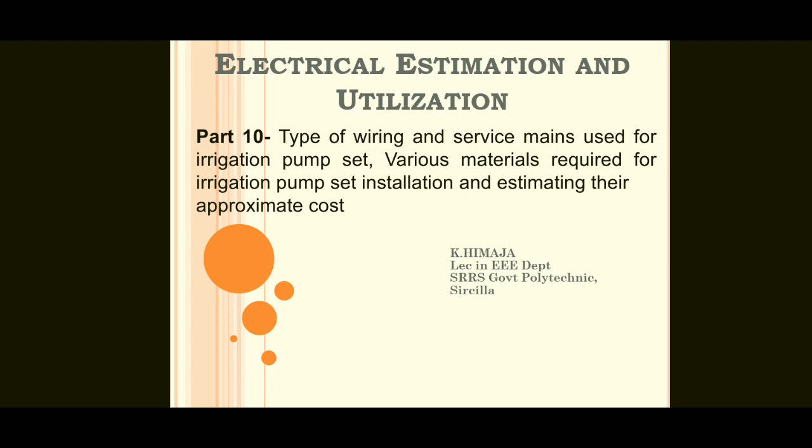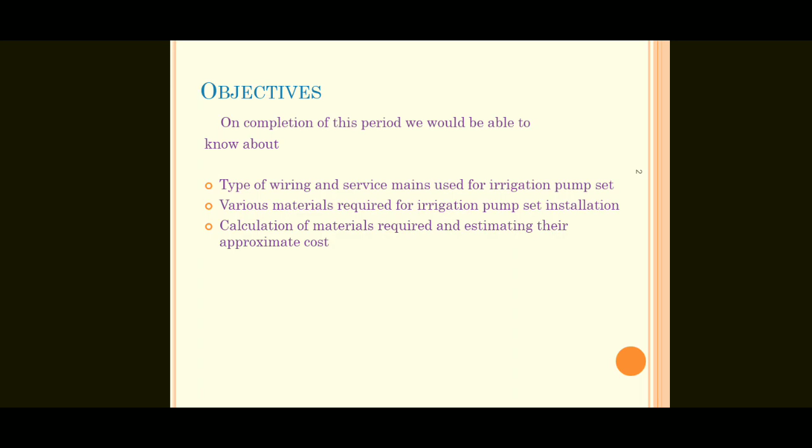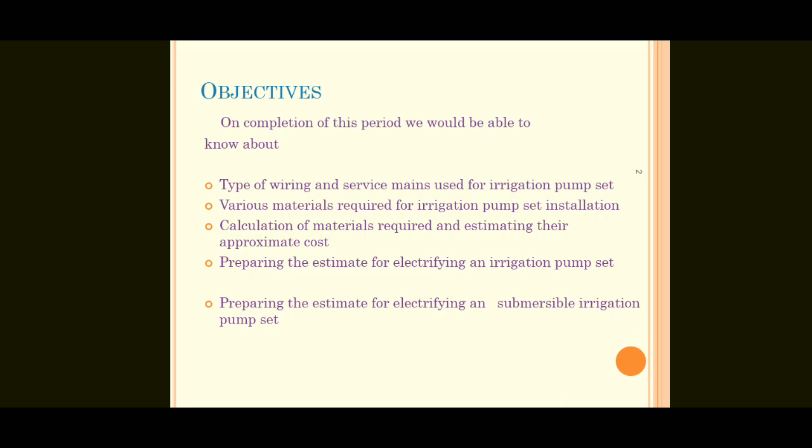So, the objectives of this part 10 are: type of wiring and service mains used for irrigation pump set, various materials required for irrigation pump set installation, calculation of materials required and estimating their approximate cost, preparing the estimate for electrifying an irrigation pump set, preparing the estimate for electrifying a submersible irrigation pump set, and 11 kV by 400 volt plinth mounted transformer.

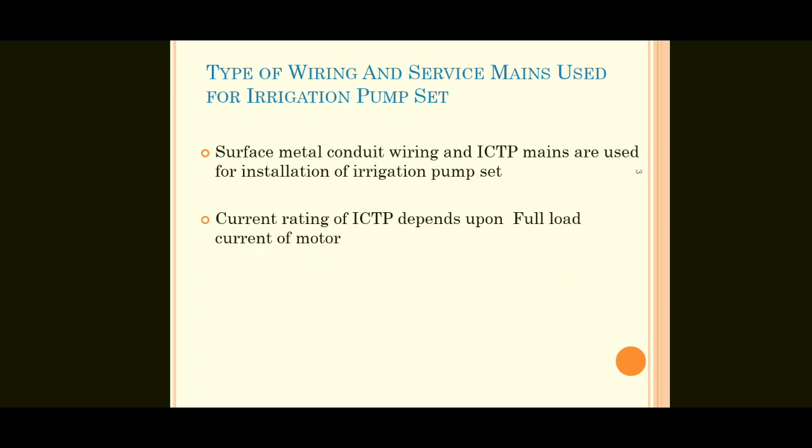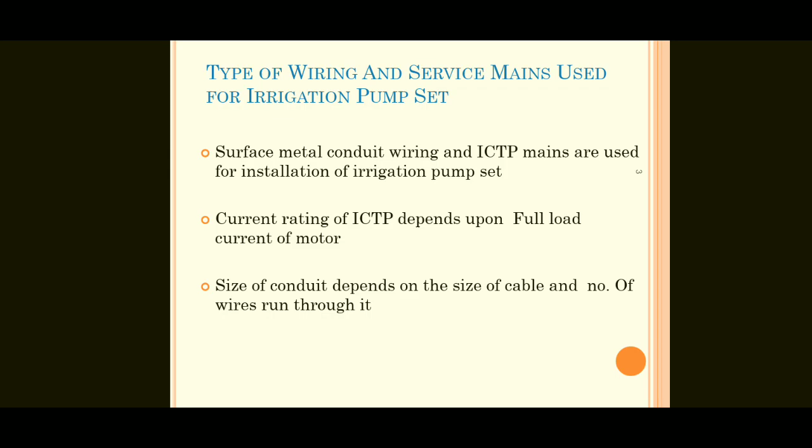Type of wiring and service mains used for irrigation pump set. Surface metal conduit wiring and ICTP mains are used for installation of irrigation pump set. Current rating of ICTP depends upon full load current of motor. Size of conduit depends on the size of cable and number of wires run through it.

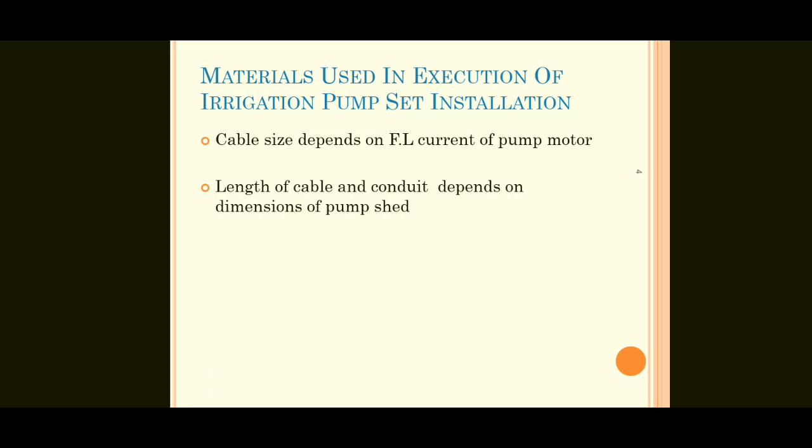Next, materials used in execution of irrigation pump set installation. Cable size depends on full load current of pump motor. Length of cable and conduit depends on dimensions of pump shed. 7/20 SWG AL WP twin core cable is used for connection of supply from the nearby pole to pump motor. The service cable length depends on the distance of its pole from pump shed.

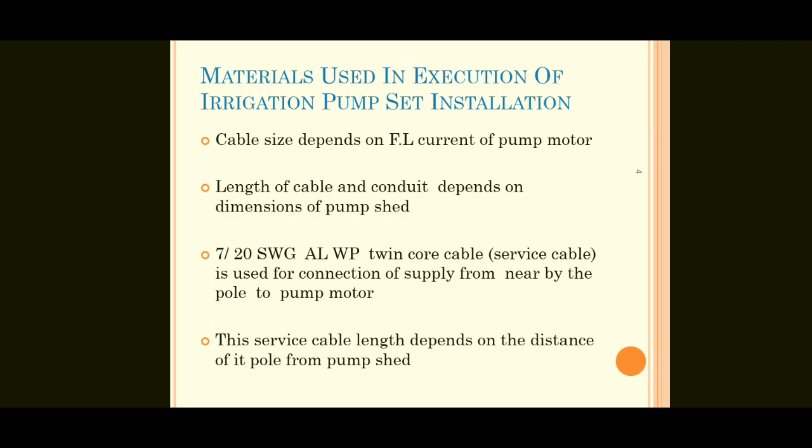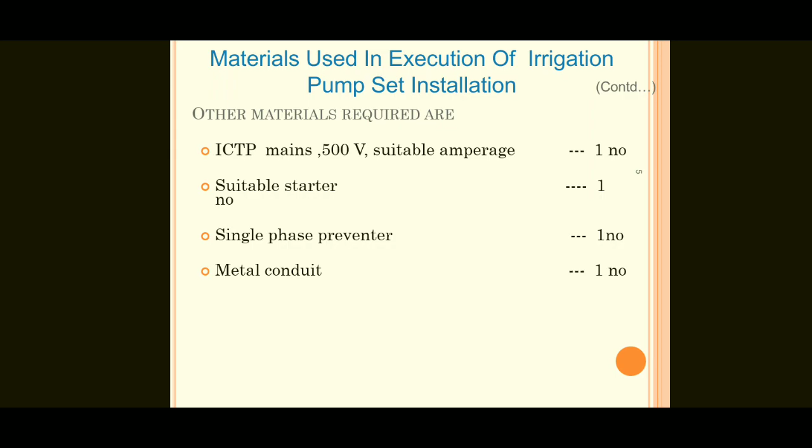So, the other materials required are ICTP mains, 500 volt, suitable amperage, 1 number, suitable starter, here using star delta starter 1, single phase preventer 1 number, metal conduit 1 number, indicating lamps 3, metal flexible conduit, panel board 50 into 30 into 20,

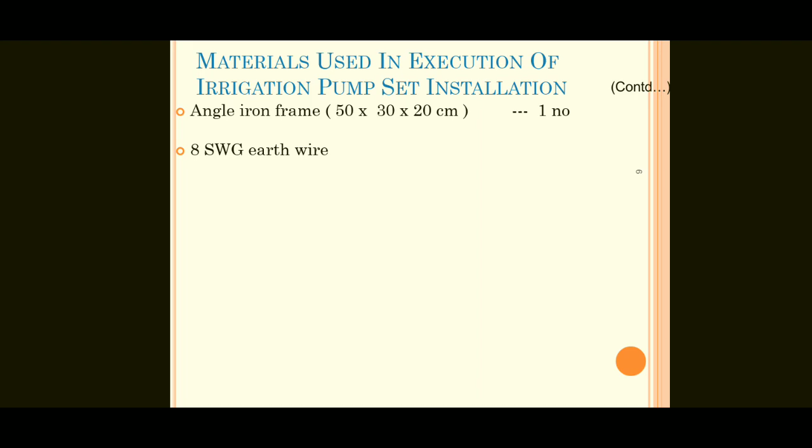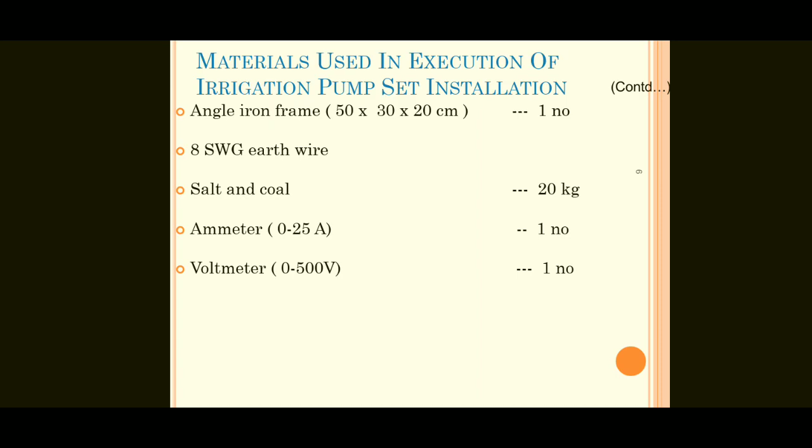angle iron frame 50 into 30 into 20 centimeter 1 number, 8 SWG earth wire, salt and coal 20 kg, ammeter 0 to 25 amps 1 number, voltmeter 0 to 500 volt 1 number, cement 2 kg, danger plate 1 number.

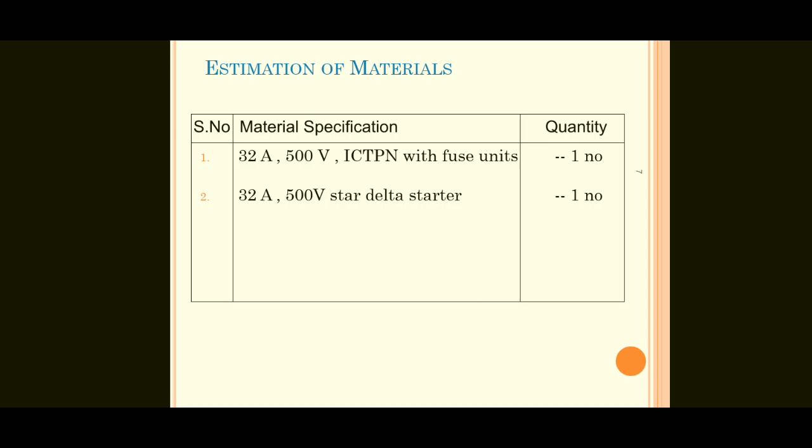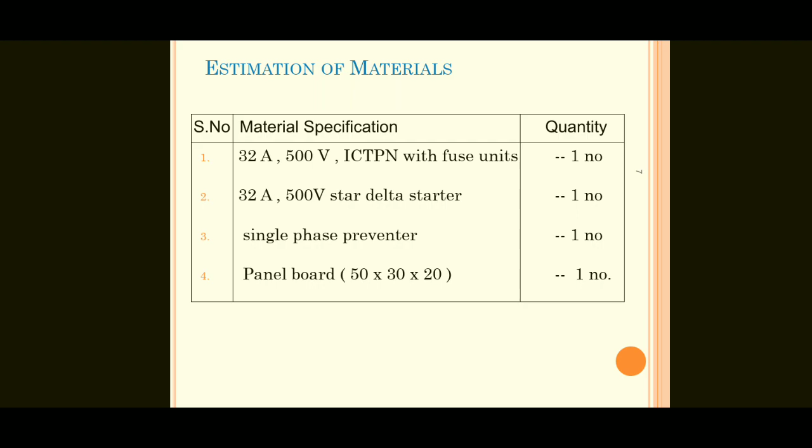Next one, material specification and quantity. Serial number 1, 32 amp 500 volt ICTPN with fuse units 1 number. 32 amps 500 volt star to delta starter 1 number. Single phase preventer 1 number. Panel board 50 into 30 into 20 1 number. 25.4 mm metal conduit, length depends on location of pump. 25.4 mm metal flexible conduit 1 meter.

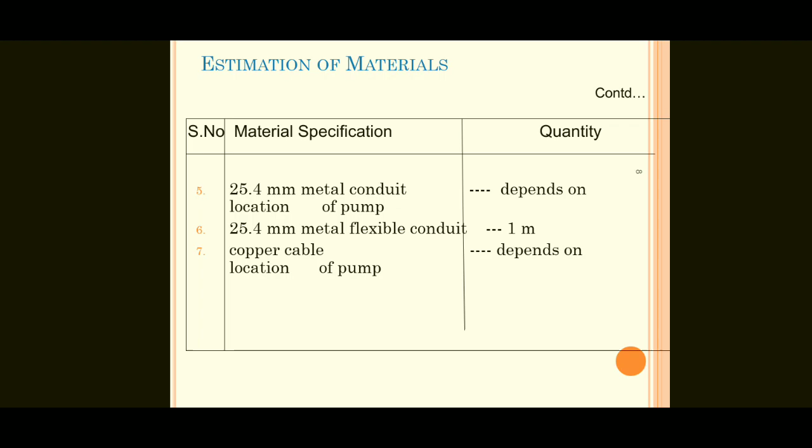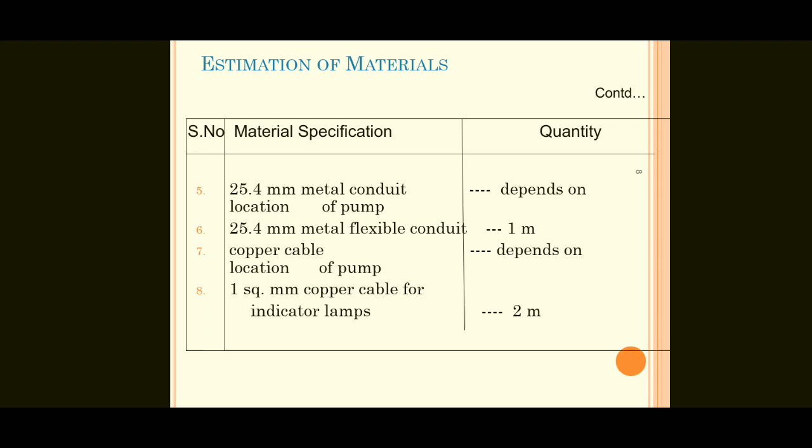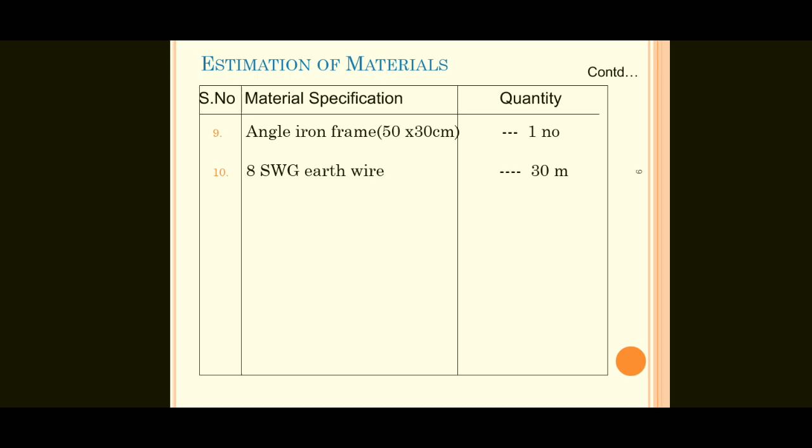Copper cable, length depends on location of pump. 1 square mm copper cable for indicator lamps 2 meter. Angle iron frame 50 into 30 centimeter 1 number. 8 SWG earth wire 30 meter. Salt and coal 20 kg. Ammeter 0 to 25 amps 1 number. Voltmeter 0 to 500 volt 1 number. Cement 2 kg. Danger plate 1 number. So 15 materials are required for irrigation pump set installation, with danger plate included.

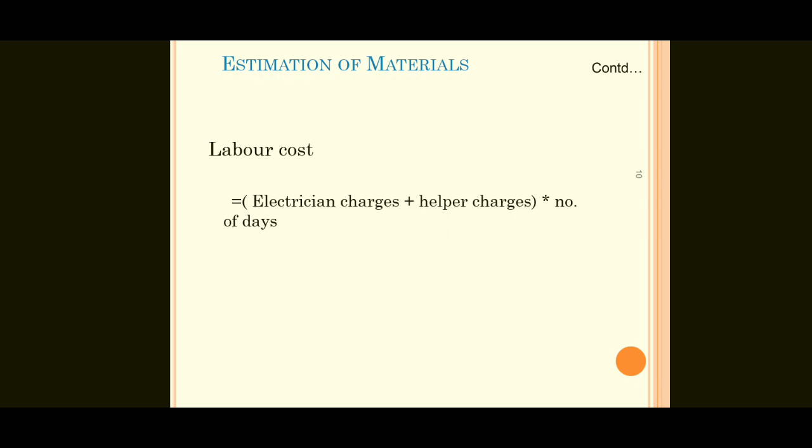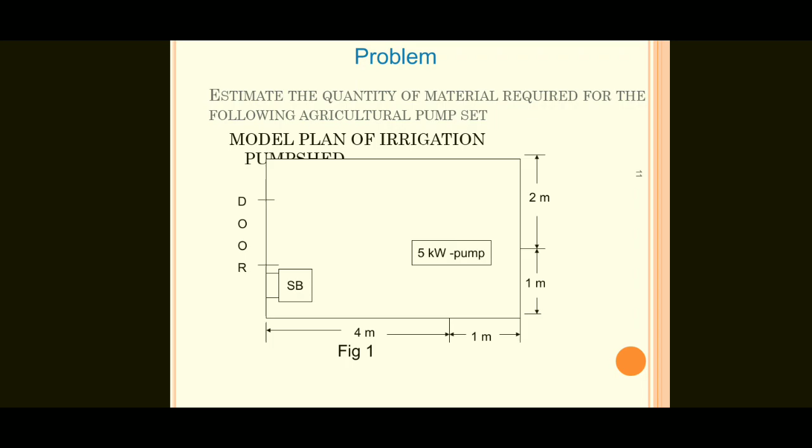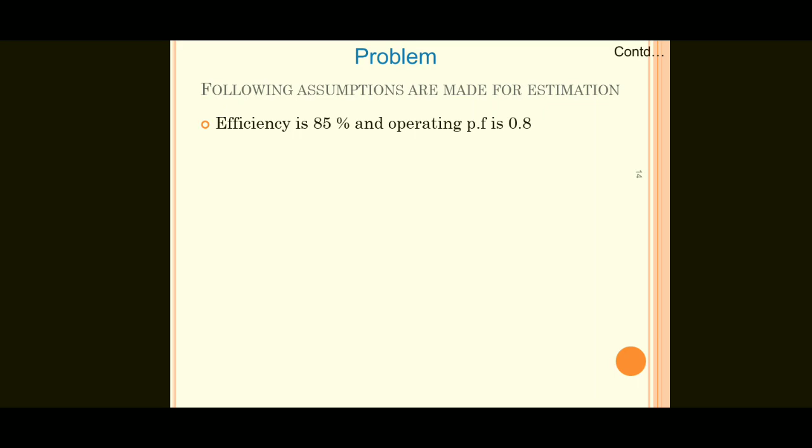Now following assumptions are made for estimation. Efficiency is 85% and operating power factor is 0.8. Distance of LT pole from SB of pump motor is 15 meter. Height of roof in the pump shed is 3.5 meter from the ground. Height of panel board and switchboard is 1.5 meter from ground. Height of HR is 3.0 meter.

Now, efficiency is 85% and operating power factor is 0.8. So, the power factor should be as high as possible. If less than 0.8, then the cost per unit is very high. To overcome these difficulties, place capacitors across the pump set to improve the power factor. Efficiency also above 85% we can expect. Means we have to minimize the losses, losses as low as possible.

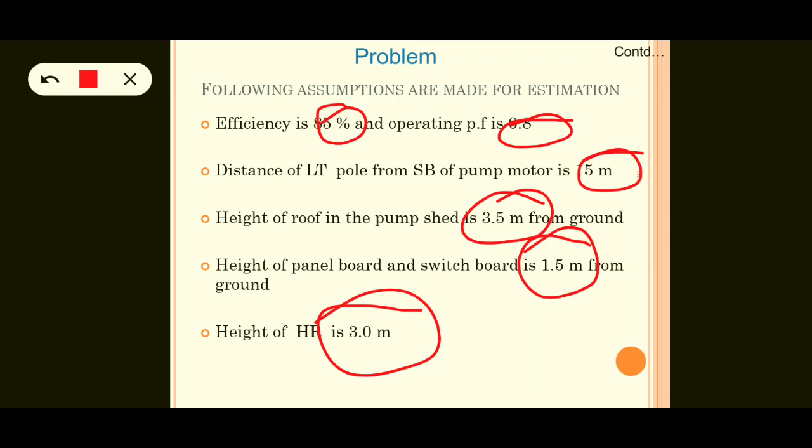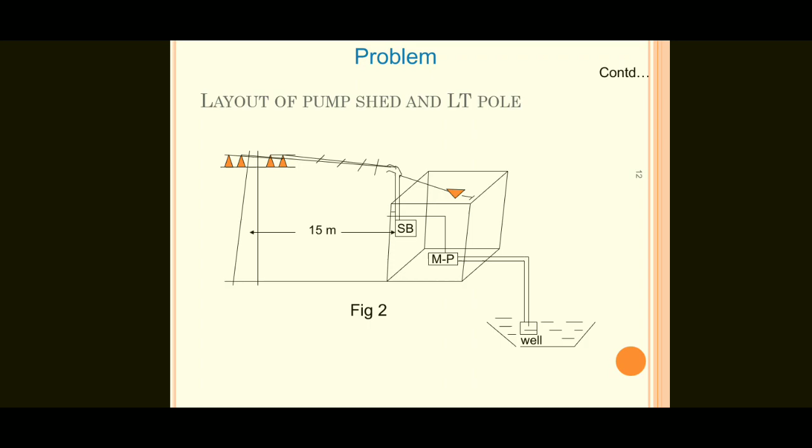Distance of LT pole from SB of pump motor is 15 meter. Next, 3.5 meter. Height of panel board and switchboard is 1.5 meter from the ground. Height of HR is 3.0 meter. So here distance of LT pole from SB of pump motor is 15 meter.

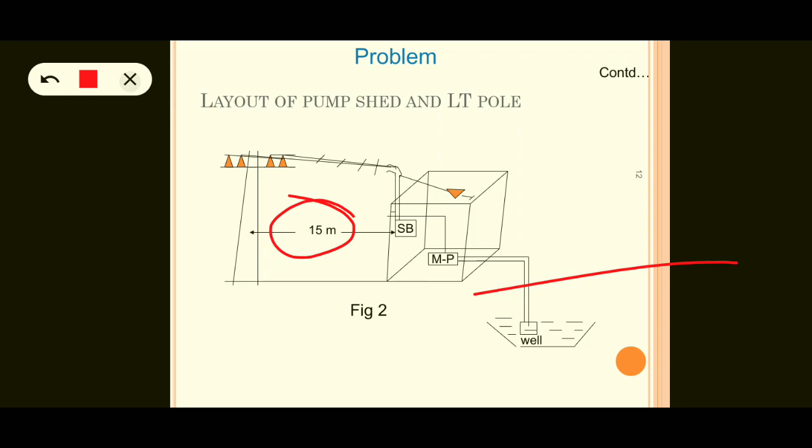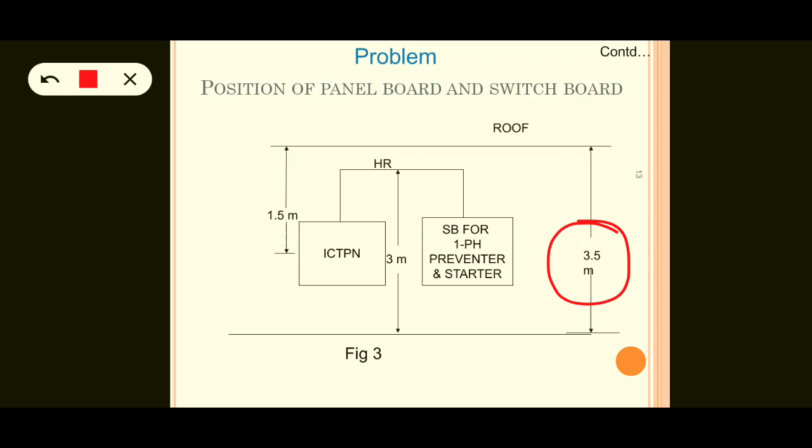Next one, height of roof in pump shed is 3.5 meter from the ground. Here 3.5 meter. Just check this value, 3.5 meter from the ground. Next one, height of panel board and switchboard is 1.5 meter from the ground. Height of HR is 3.0 meters. Now assume 3.0 meters. So one is 3.5 meter, 1.5 meter, 3 meter.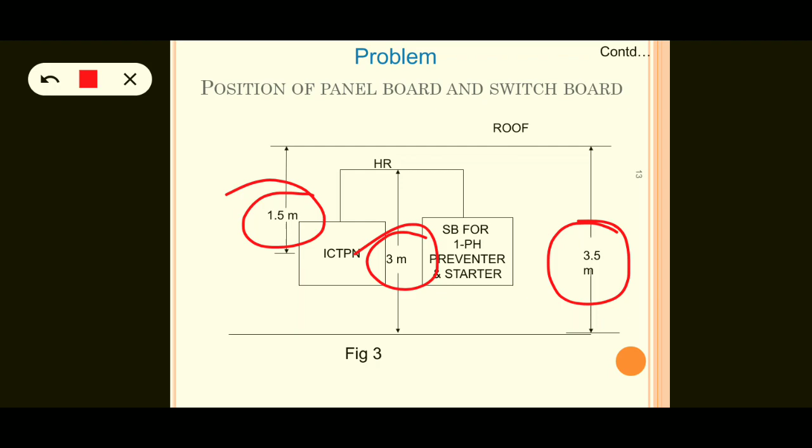Distance of LT pole from SB of pump motor is 15 meter. Efficiency is 85% and operating power factor is 0.8. Now, a simple wiring diagram of pump set. Here ICTPN, RYBN, single phase preventer, star-delta starter, pump motor, indicating lamps.

RYBN: red, yellow, blue, neutral. 3-phase supply is connecting to ICTPN. Next, from each phase, from ICTPN R to the single phase preventer. Each phase is connecting. Similarly, Y, B and N. All are connected to the single phase preventer with lamps.

Means the supply is on, the lights will glow. Off means there is no supply, the lights are not glowing. So name as indicating lamps. So from this, connecting the single phase preventer to star-delta starter. Next to pump motor. Here initially star. Once the motor reaches rated speed, connect in delta connection.

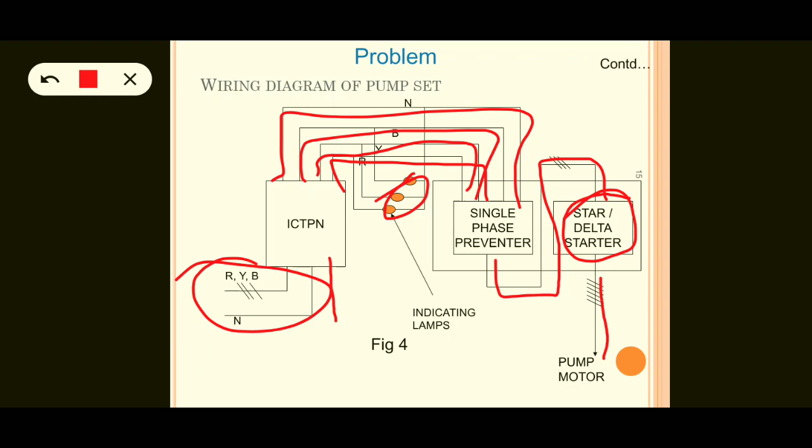Why are we connecting in star? Initially the heavy current flows in the circuit. Because in star connection, I phase is equal to IL. So to overcome this heavy current, run the motor initially in star. Once it reaches the rated speed, place in delta connection. Now pump motor. This is the procedure of wiring diagram of pump set. From the 3-phase supply to single phase preventer with lamps, from the single phase preventer to star-delta starter, from the starter to pump motor.

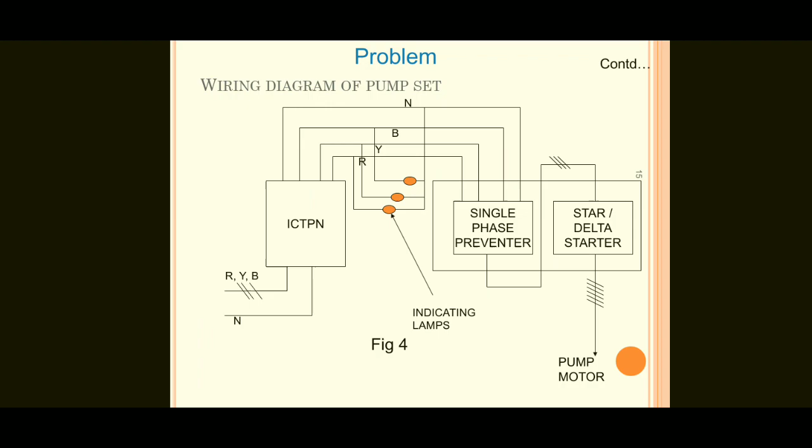Next one, a simple problem on pump set. Size of wire, cable: full load current of motor is equal to kilowatt into 1000 by root 3 into V into power factor into efficiency. 5 into 1000 by root 3 into 400 into 0.8 into 0.85 is 10.61 amps. Because the power factor is 0.8, efficiency 0.85 and the motor is a 5 kilowatt motor, the value becomes 10.61 amps.

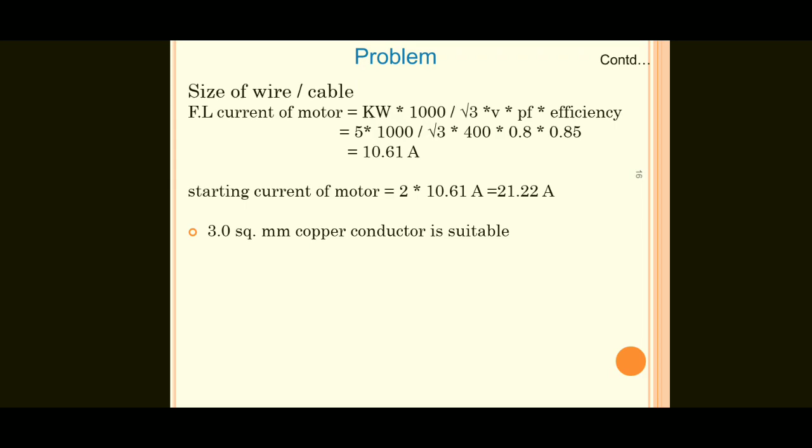Next one, starting current of motor is equal to 2 into 10.61 amps, 21.22 amps. So 3.0 square mm copper conductor is suitable. 1.0 square mm copper cable is suitable for indicating lamps. Size of conduit: 6 wires are run from the star-delta starter to motor terminals. Hence 25.4 mm heavy gauge metal conduit is used.

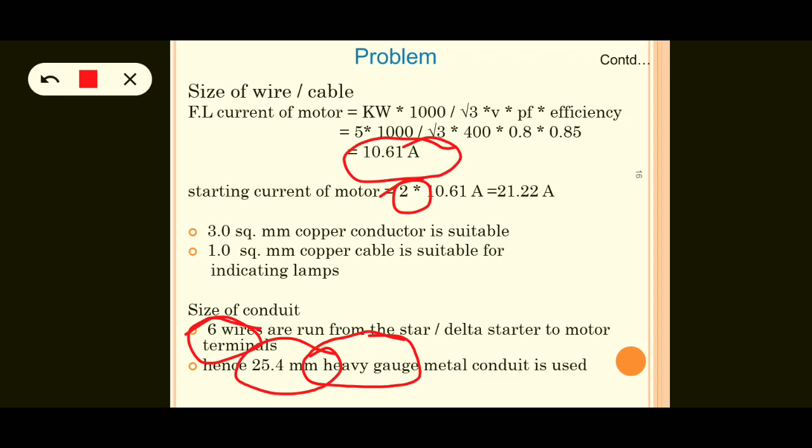Here 10.61 amps. Starting current is 2 to 3 times the full load current for any machine. Here approximately take the value as 2. So 2 into 10.61 is equal to 21.22 amps. So to withstand this high current rating of the pump set motor, the 6 wires are run from the star-delta starter to motor terminals, and heavy gauge means to withstand these high currents, so 25.4 mm heavy gauge metal conduit is used.

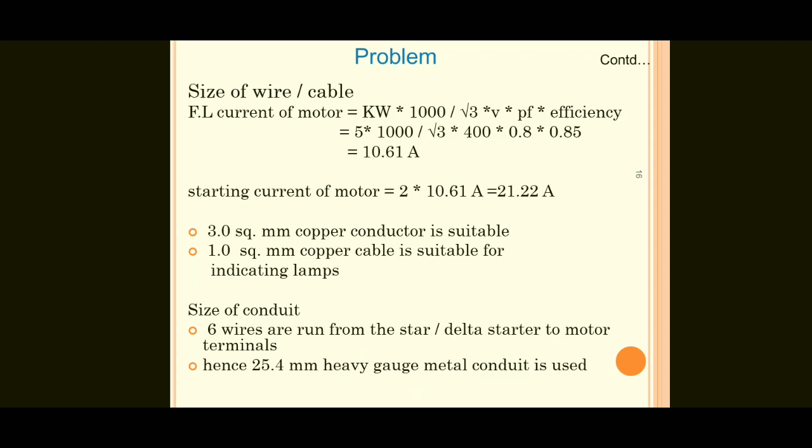So length of conduit on the roof 2 meter. Next, length from SB to motor base: 1.5 plus 1 plus 4 plus 3 plus 1, 10.5 meter. Total length 2 plus 10.5 is equal to 12.5 meter plus 10% wastage. 12.5 plus 1.25, 13.75 meter, 14 meter.

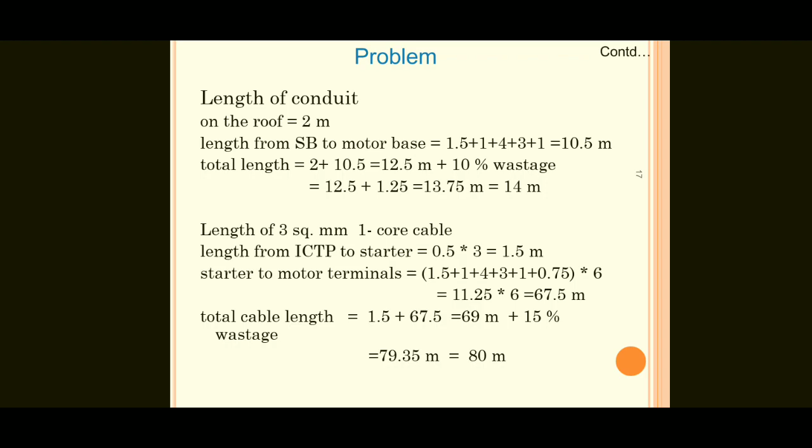Length of 3 square mm 1 core cable. Length from ICTP to starter: 0.5 into 3, 1.5 meter. Starter to motor terminals: 1.5 plus 1 plus 4 plus 3 plus 1 plus 0.75 into 6, 11.25 into 6, 67.5 meter. Total cable length with wastage: 1.5 plus 67.5 is equal to 69 meter plus 15% wastage is equal to 79.35 meter, 80 meter.

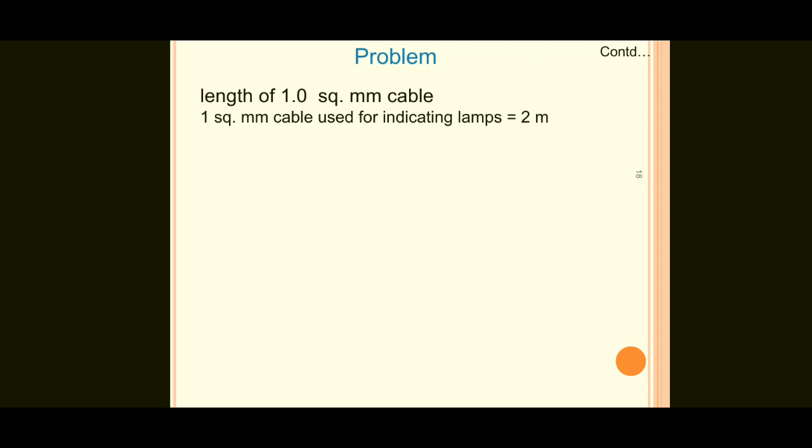Length of 1.0 square mm cable: 1 square mm cable used for indicating lamps, 2 meter. Length of service cable means length of 7/20 SWG aluminum WP twin core cable used for connecting the LT pole to SB of pump shed. 15 plus 2 into 2, 34 meter, plus 15% for sag and end connections is equal to 39.1 meter, equal to 39 meter. 0.1 is very small, so negligible.

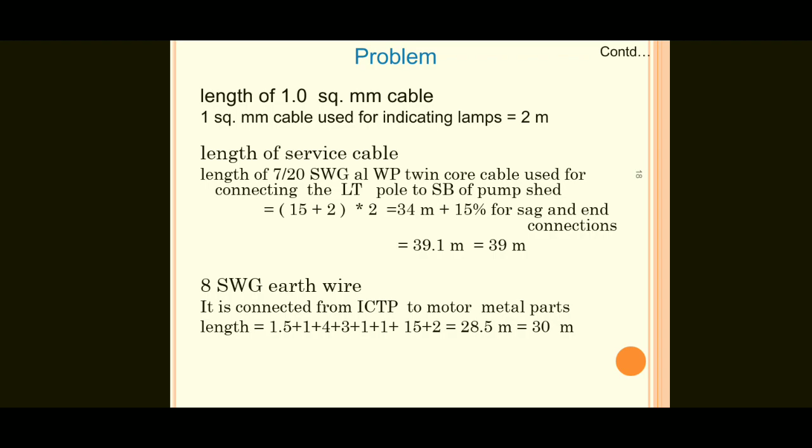8 SWG earth wire. It is connected from ICTP to motor metal parts, length 1.5 plus 1 plus 4 plus 3 plus 1 plus 1 plus 15 plus 2, 28.5 meter, equal to 30 meter.

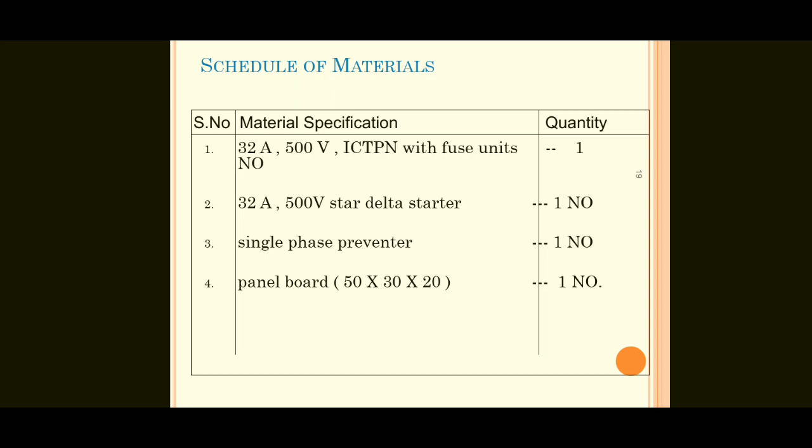So schedule of materials for pump set: 32 amp 500 volt ICTPN with fuse units, 1 number. 32 amp 500 volt star-delta starter, 1 number. Single phase preventer, 1 number. Panel board 50 into 30 into 20, 1 number. 25.4 mm metal conduit, 14 meter. 25.4 mm metal flexible conduit, 1 meter.

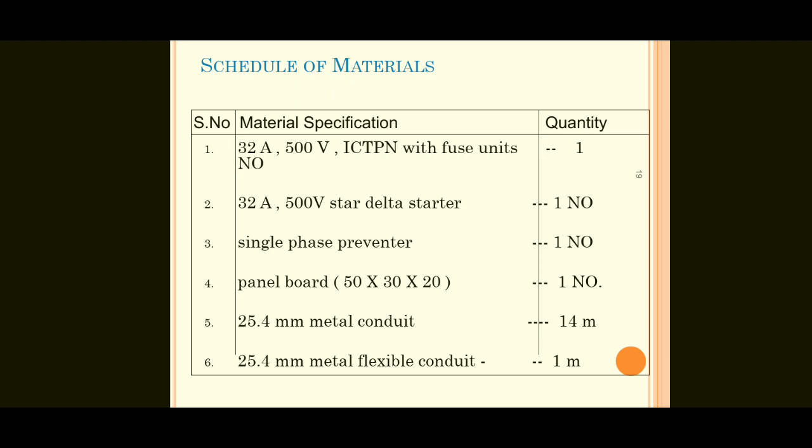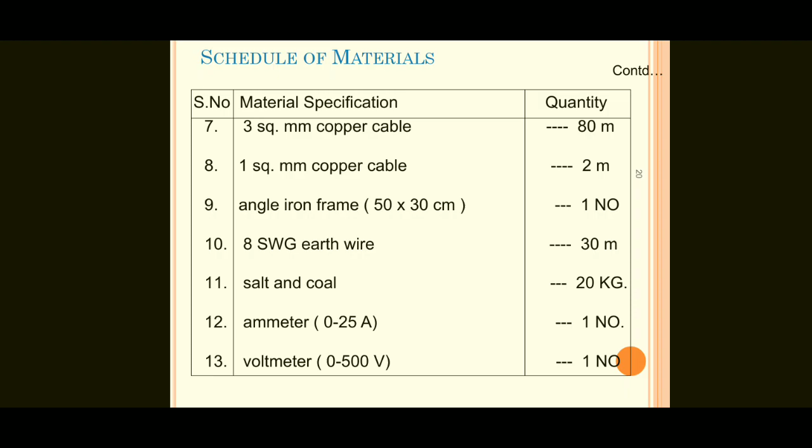3 square mm copper cable, 80 meter. 1 square mm copper cable, 2 meter. Angle iron frame 50 into 30 centimeter, 1 number. 8 SWG earth wire, 30 meter. Salt and coal, 20 kg. Ammeter 0 to 25 amps, 1 number. Voltmeter 0 to 500 volt, 1 number.

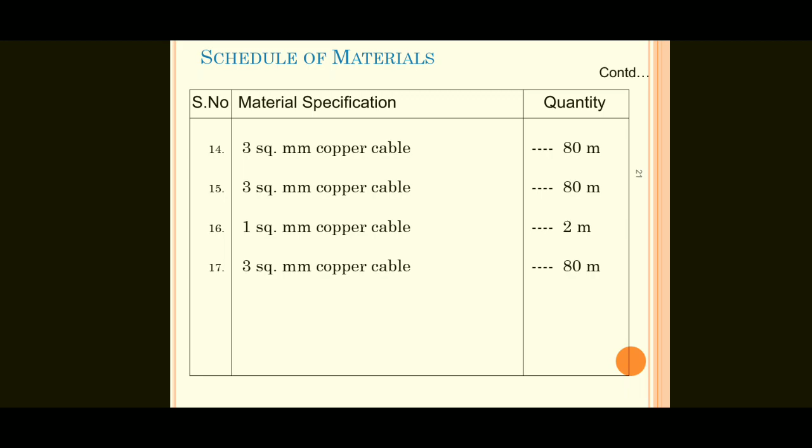3 square mm copper cable, 80 meter. 1 square mm copper cable, 2 meter. Labor cost means, as already discussed, electrician charges plus helper charges into number of days.

So now this is the material required of irrigation pump set. So what are the materials required? And the material specifications and also the labor cost are calculated.

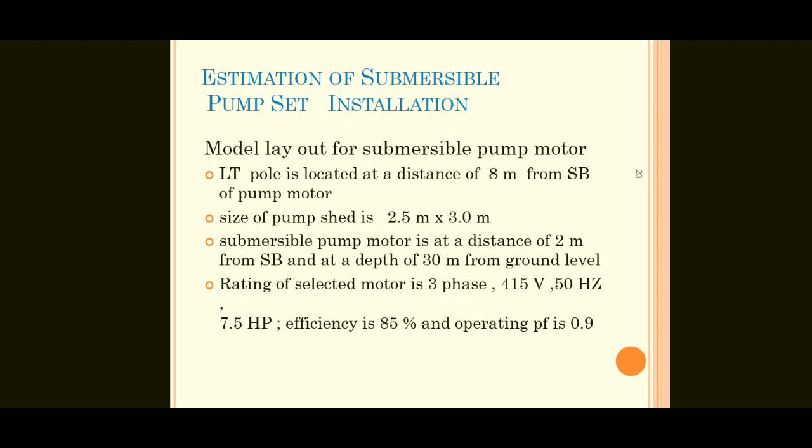Rating of selected motor is 3-phase 415 volt 50 Hz 7.5 HP. Efficiency 85% and power factor is 0.9. Here the important points are 7.5 HP. 1 HP is equal to 735.5 watts. Before, the pump set was 5 HP. Efficiency is same, 85%. Next, here in this case the operating power factor is 0.9; before case 0.8. 7.5 HP instead of 5 HP. 85% is same. Instead of 0.8, now in this case we assume the power factor is 0.9.

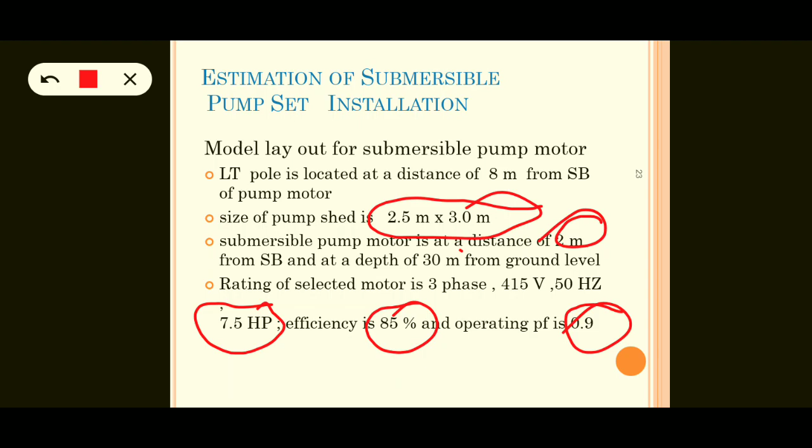Size of pump shed is 2.5 into 3.0 meter. Next 2 meter, 30 meter. These are the ones, you remember. Next one. Now this is the layout of submersible pump set, LT pole and tube well. Now here the submersible pump motor is at a distance of 2 meter. You see this one, 2 meter.

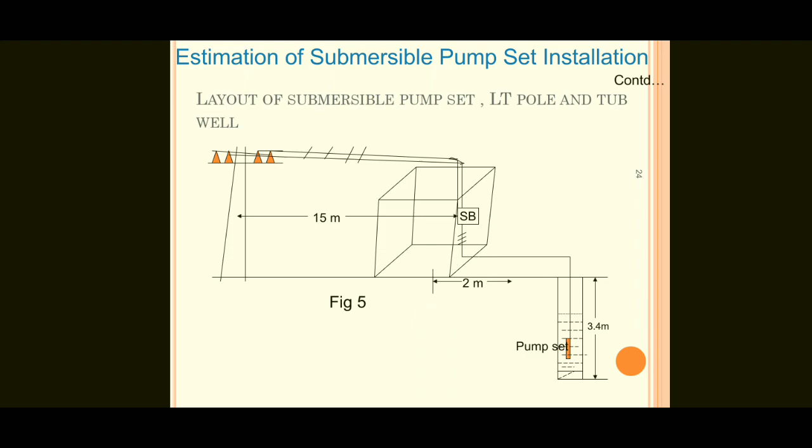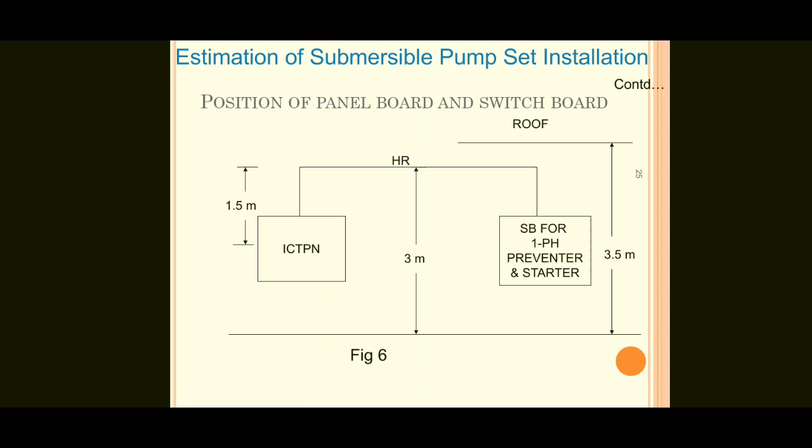Next one, ICTPN, SB for single phase preventer and starter, position of panel board and switchboard. So now the height of the roof from the ground is 3.5 meter. Next, the HR is 3 meter and ICTPN to HR is 1.5 meter. Next one, wiring diagram of pump set. RYB. Here pump set means submersible pump set installation. So ICTPN, RYBN, single phase preventer, direct online starter.

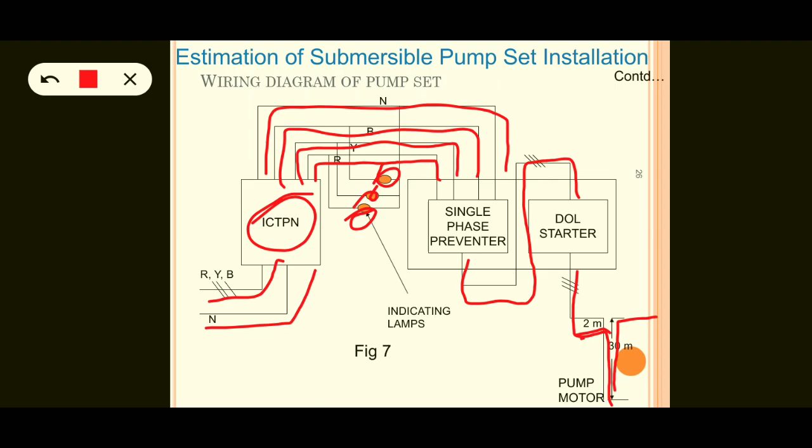So here the configuration shows from RYB and N to ICTPN input, from ICTPN output to single phase preventer R, Y, B and N. Next, for each phase they are placing lamps, means if the circuit is in running condition, the lamps will glow, otherwise the lamps will not glow. Next one, from single phase preventer to direct online starter. Before case they were using star delta starter, now in this case they are using the direct online starter. Next, from direct online starter to pump motor is 2 meter and 30 meter. So this is the wiring diagram of pump set.

Size of wire or cable, same as usual previous procedure. Full load current of the motor: efficiency means output by input. Output was 5 HP; here they are using 7.5 HP motor. Input is √3 VL IL cos phi. We have to calculate the current. So IL is equal to output by √3 V into power factor into efficiency. So 7.5 into 735.5 by √3 into 415 into 0.9 into 0.85. So finally we got 10.03 amps, approximately 10 amps.

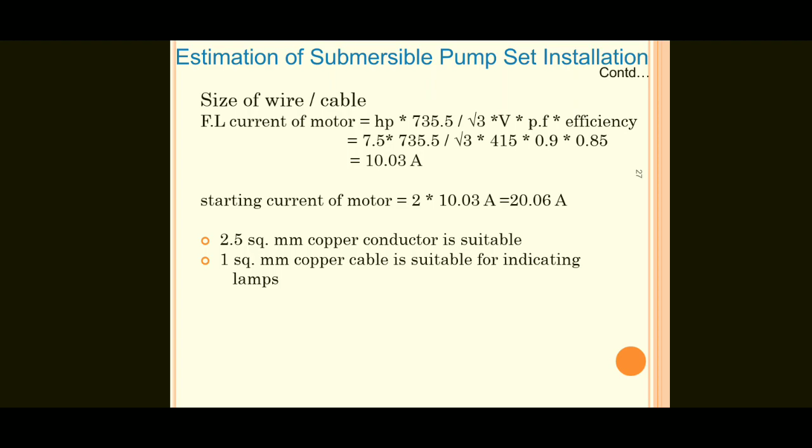Next one, starting current of motor is equal to 2 times 10.03 amps, equal to 20.06 amps. Starting current is 2 to 3 times the full load current. Here we are assuming the value as 2 times, so multiplied with 2. Next, 2.5 square mm copper conductor is suitable. 1 square mm copper cable is suitable for indicating lamps. Size of conduit: 3 wires are run from the direct online starter to motor terminals. 19 mm heavy gauge metal conduit is used.

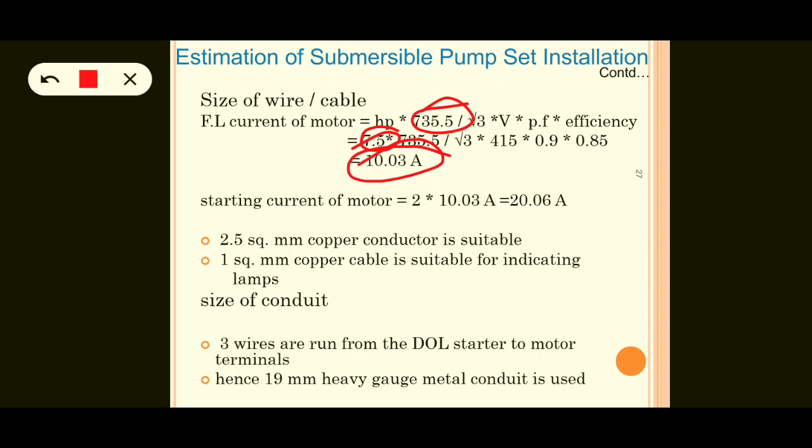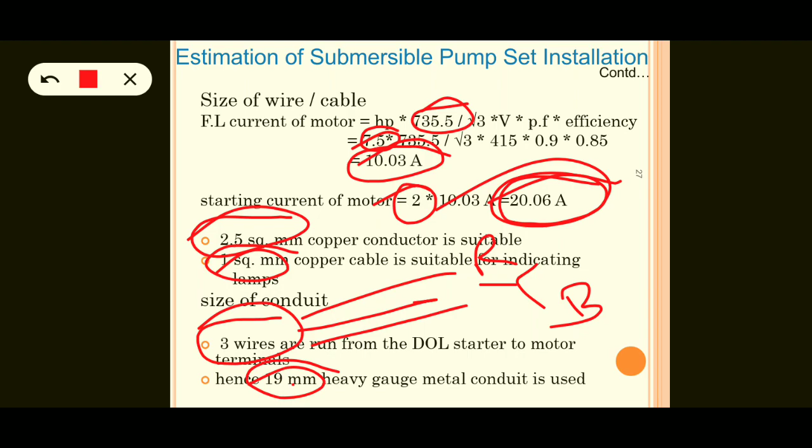Here 7.5 HP they are using. Convert from horsepower to kilowatts: 1 horsepower is equal to 735.5 watts, so multiplied by 735.5. Finally, we got 10.03 amps. Starting current is 2 to 3 times the full load current, so 2 times, approximately 20.06 amps, assume 20 amps. So 2.5 square mm copper conductor is suitable. 1 square mm is suitable for indicating lamps. 3 wires are run from the direct online starter to motor terminals; 3 wires means RYB. Hence 19 mm heavy gauge metal conduit is used, because the current is 20.06 amps.

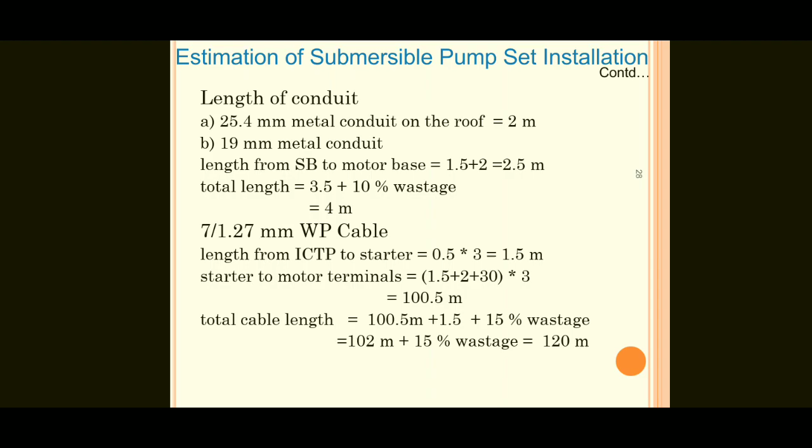7 by 1.27 mm WP cable. Length from ICTP to starter 0.5 into 3, 1.5 meter. Starter to motor terminals 1.5 plus 2 plus 30 into 3, 100.5 meter. Total cable length 100.5 plus 1.5 is 102 meter, plus 15% wastage, 120 meter. Next one, length of 1 square mm cable: 1 square mm cable used for indicating lamps, 2 meter.

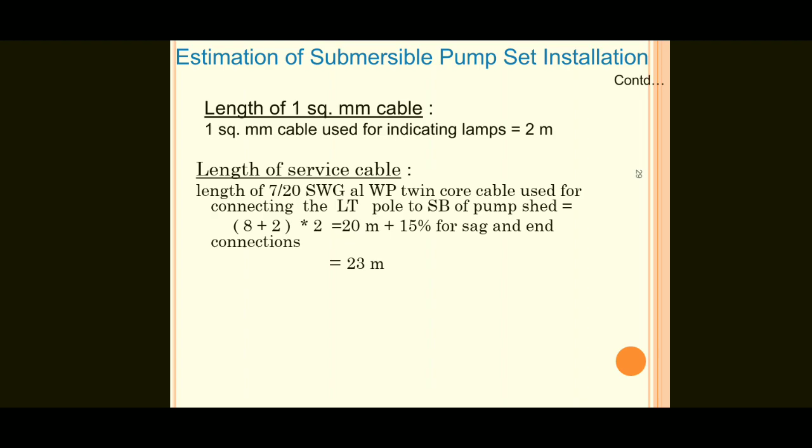Length of service cable. So length of 7 by 20 SWG AL WP twin core cable used for connecting the LT pole to SB of pump shed: 8 plus 2 into 2 is equal to 20 meter plus 15% for sag and end connection, 23 meter total. 8 SWG earth wire is connected from ICTP to motor metal parts, length is equal to 10 plus 3.5 plus 2 plus 30 plus 15% for sag and end connections, means 50 meter.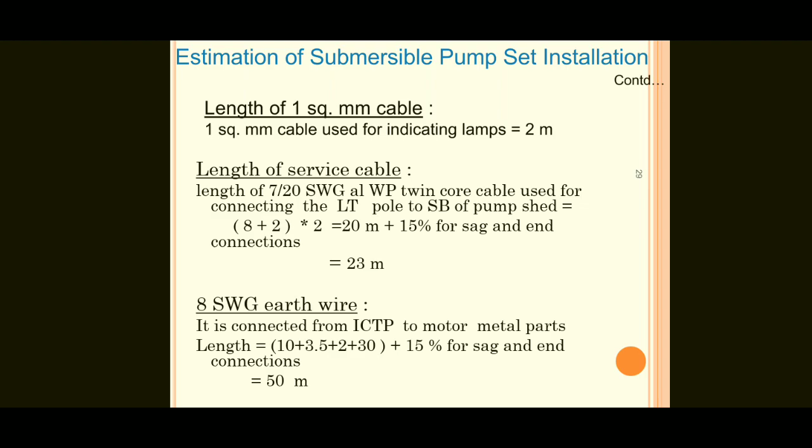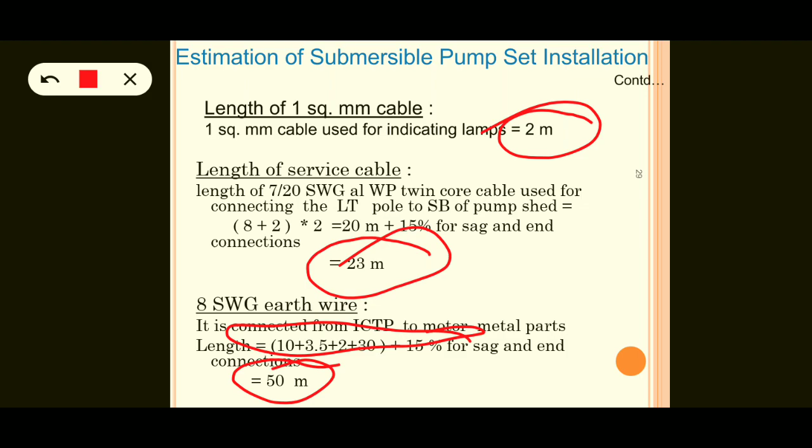So here the length of 1 square mm cable is 2 meter. 7 by 20 wire, 23 meter. 8 SWG earth wire, with calculation of sag and end connections, required is 50 meter. So next one, estimation of materials, material specifications and quantities.

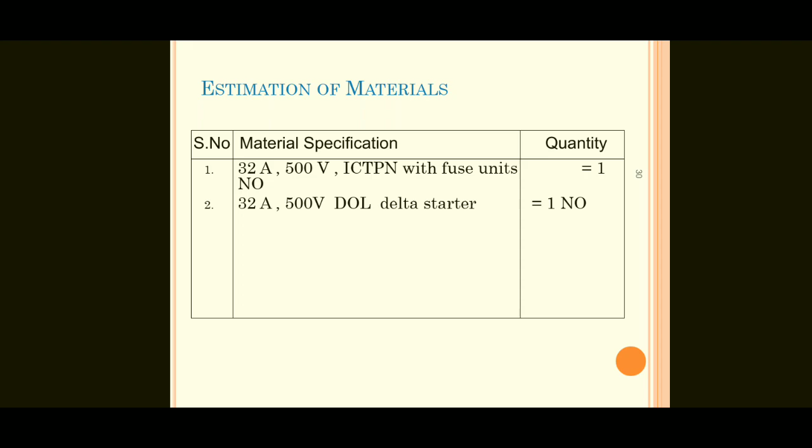So, material specification and quantity: 32 amp 500 volt ICTPN with fuse units, 1 number. 32 amp 500 volt direct online delta starter, 1 number.

Single phase preventer, 1 number; 25.4 mm metal conduit, 2 meters; 19 mm metal conduit, 4 meters; 2.5 square mm copper cable, 120 meters; 1 square mm copper cable, 2 meters; panel board 50 into 30 into 20, 1 number.

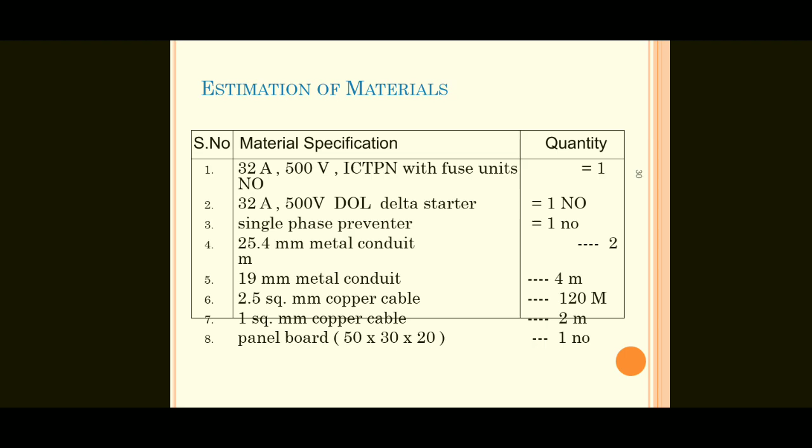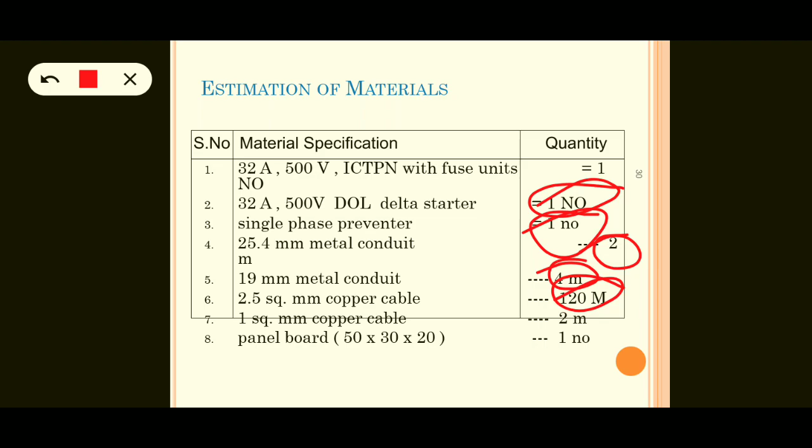So you remember: ICTPN with fuse units as 1, direct online starter 1 number, preventer 1 number, 25.4 mm metal conduit 2 meters, 19 mm 4 meters, 2.5 square mm copper cable 120 meters, 1 square mm copper cable 2 meters, panel board 1 number.

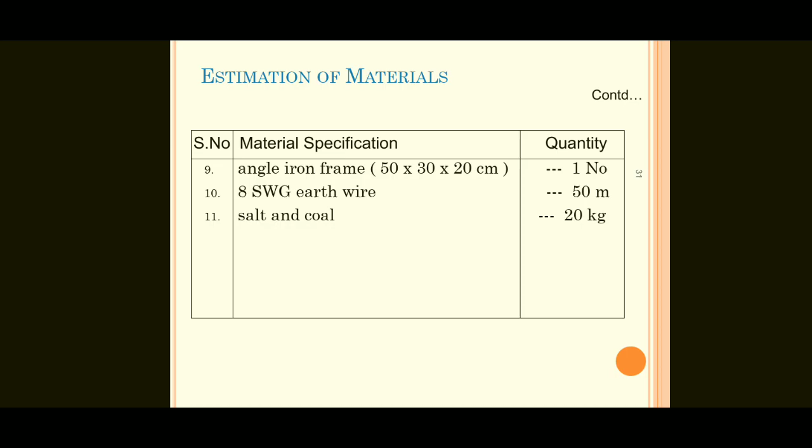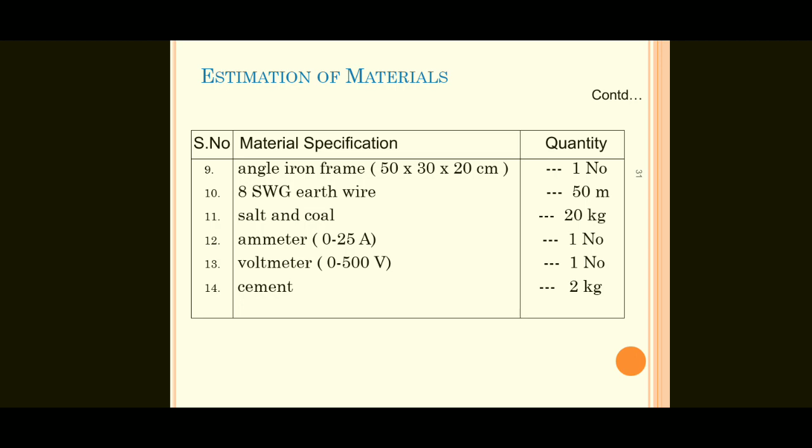And also the continuation: angle iron frame 50 into 30 into 20 centimeter, 1 number. 8 SWG earth wire, 50 meters. Salt and coal, 20 kg. Ammeter 0 to 25 amps, 1 number. Voltmeter 0 to 500 volt, 1 number. Cement 2 kg. Danger plate, 1 number.

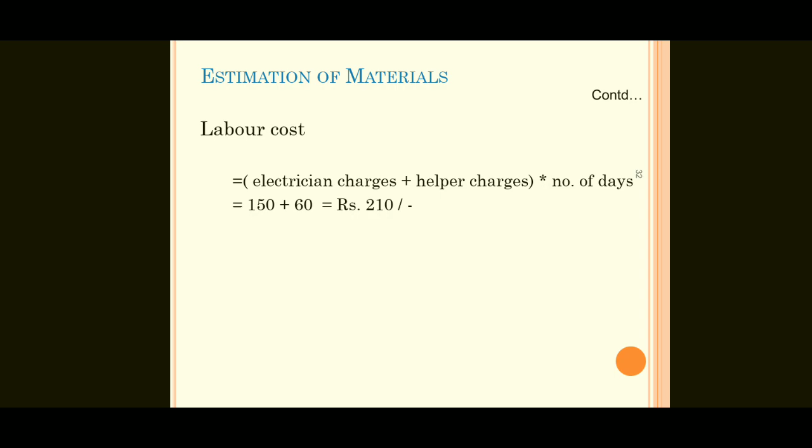Next one, labor cost calculation: electrician charges plus helper charges into number of days. 150 plus 60 is equal to 210 rupees. Now, we have discussed preparing the estimate for electrifying an irrigation pump set and a submersible irrigation pump set. For both of these, we studied the single layout diagram, estimation cost, material required, labor cost and specifications.

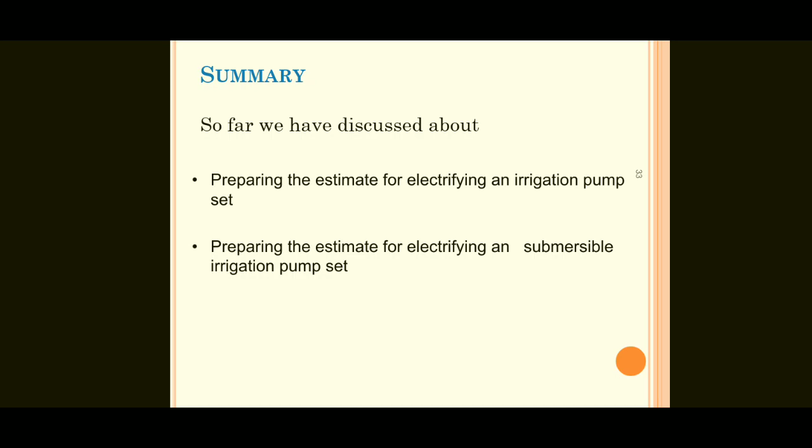Now, the frequently asked important questions are: prepare the quantity estimate required for installation of an irrigation pump set in a pump shed of size 4 meter into 3.5 meter into 3.5 meter. Take the power rating of the pump motor as 10 HP, 440 volt, 50 Hz, and the distance of the LT pole is 15 meters.